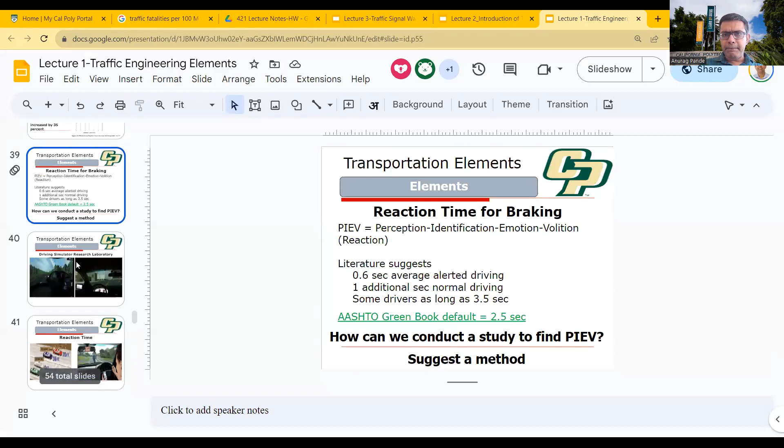So this is where we were. So let's go back and pick up this discussion. We were talking about some of the dynamic characteristics of vehicles when we left off.

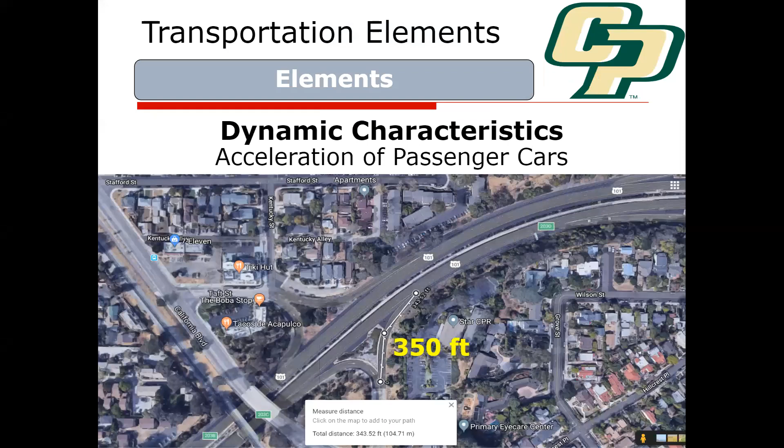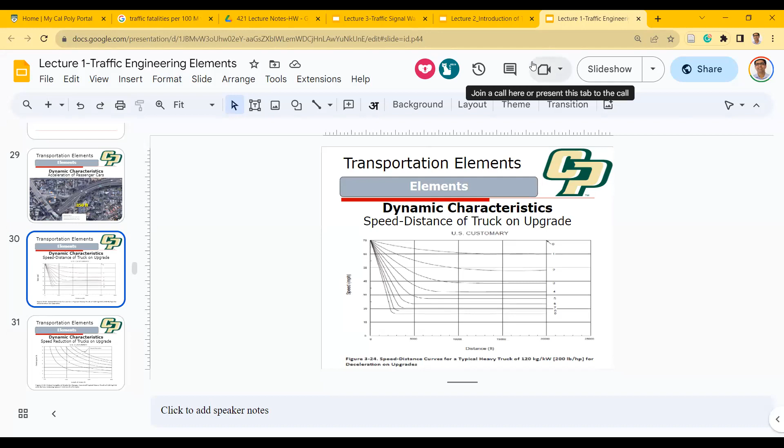So let me go ahead and do the slideshow thing here. I think we need to put videos. Video. Okay. And again, this is sort of the curve. Oh, some days it works really well, some days it doesn't. Show this.

Okay. Next up, we were talking about dynamic characteristics, and one of them we talked about was acceleration, where you have the cars having to accelerate to a certain value. And then this is about the trucks and what happens to truck speed as they climb an uphill grade. You could see that if the trucks are starting at 70 miles an hour, the speed comes down pretty significantly if they're traveling on an 8 or 9% upgrade.

And this plays a pretty important role when we are doing level of service analysis for freeways, for example, right? So if you have a certain percentage of trucks that are significant, and you have maybe just 2 lanes in each direction on a freeway, or if you have more lanes, then you obviously have, as a car, the option to change lanes and go faster, and that is okay in terms of highway capacity, and you could probably maintain a little bit higher level of service.

But if you only have, let's say, 2 lanes, and you don't have a lot of opportunities to change lanes, then the level of service gets pretty significantly impacted, because the factor for heavy vehicles goes up pretty significantly. And the reason comes from this exact curve, which is the speed-distance of trucks on upgrade. And this is US customary units. So it depends on how long your upgrade is. For example, if you have a short upgrade, something like 1,000 feet. So this is dividing it into 1,000, 2,000.

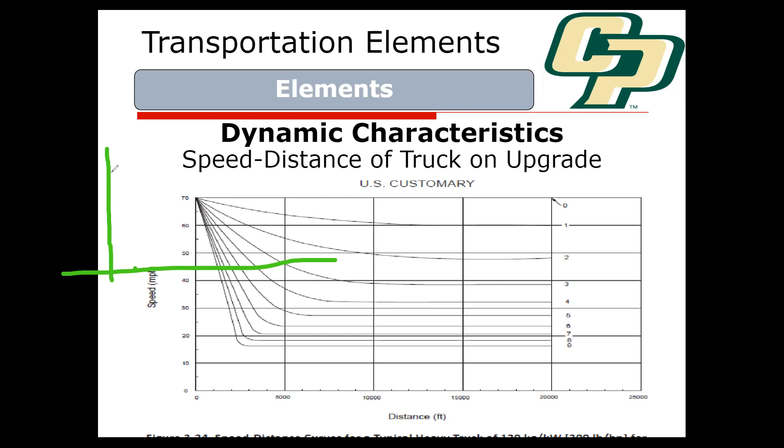So let's think about this, right? Let's say you have this speed capacity curve. I'm trying to draw a speed flow curve, and in the real world, a speed flow curve looks something like this. It remains straight for a while, and then it drops at that point, right? So sometimes what happens in rural areas is that it goes straight, and then it drops when you approach capacity.

On the x-axis you have the flow, or demand, and on the y-axis you have speed. And you could see that speed remains constant for a while, and then it drops as you approach capacity of the road. Now, in rural areas, you might be, for example, in this part of the chart. And then if you add capacity, now you're in this part of the chart.

So you're not actually impacting speed. That means you're not actually impacting travel times. And so in this case, because you're not impacting travel times, you might not be adding additional demand, because additional demand comes from actually reducing the travel cost, right? But in urban areas, it makes a big difference, because in urban areas you're mostly operating over here at capacity a lot of times during peak hours.

And if you move to this area by adding more capacity, now you're actually improving speed. That means you're reducing the travel time, and reducing the travel time would induce more demand, right? So that's an interesting question. I think that shift to VMT is pretty valuable, but I keep coming back to that question. As transportation professionals, as traffic engineers, we have to be aware of the context. The context is pretty much everything. If we try to fit in one-size-fits-all solutions, they don't always work.

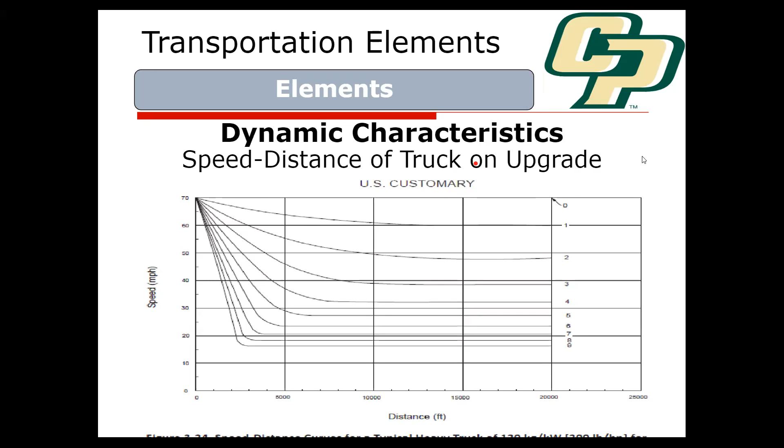Okay, and then speed reduction on upgrades. So this is, you could have a speed reduction of as much as 30 miles an hour depending on your length. So this is another way of representing something similar, but now critical length of grade for design. So this is sort of your acceptable speed reduction that would be available to you.

So if you're dealing with an 8% grade, you want to have a speed reduction of no more than 30 miles an hour, because obviously on an 8% grade, you would see a lot of speed reduction, right? But what's your acceptable value? So you want to be sort of on the edge of this curve and not go to the right of this curve. And that's acceptable.

So this curve sort of defines what your acceptable speed reduction is going to be. So if you're talking about, let's say, a 2% grade, you're going to be okay with providing like a 2,000 feet grade and a little bit less than 2%. So for a 2% grade, we are okay with a 5 miles per hour reduction. But if you're talking about, let's say, an 8% grade of 1,800 feet, then you could accept a speed reduction of up to 30 miles an hour. You don't want that to be higher than that.

So this is sort of critical length of grade for design. And then this is for a typical truck. And we assume that the entering speed is 70 miles an hour, right? So these are the curves applicable for freeways, because that's where you assume that high of a speed. And you could figure out what would be your acceptable speed reduction. And acceptable speed reduction would be anything to the left of those curves, depending upon the context that you're looking at, right?

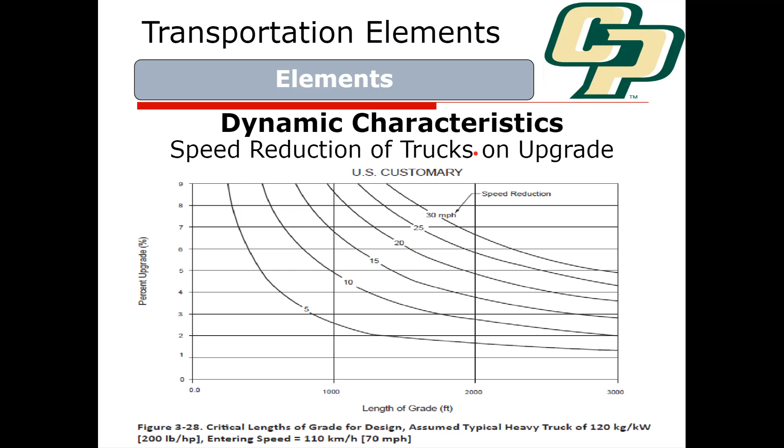And again, you could accept a larger speed reduction if you have a truck climbing lane, for example, because the trucks can simply move over to a right-hand lane or something like that. So for example, on Cuesta grade, that acceptable speed reduction works because now we have that truck climbing lane on the right side, and coming downhill as well, we have another lane. So you could work with that grade rather than having a lot of big congestion on that road.

So climbing and passing lanes, where should we add those climbing lanes? There are some sort of formulas for that. I'm going to talk about where we should add climbing lanes, especially on 2-lane roads where there are significant upgrades. We need climbing lanes. It's not necessarily that we are trying to always speed up cars, but it's also a safety concern too. Like if a big line of cars happens, and then you have these no passing zones, these double solid yellow lines in the middle.

A lot of times people will ignore those signs, right? So you want to be on the edge of that. And that's what makes it very complicated. The complication comes from the fact that you want the drivers to be at a manageable speed, but if you frustrate them too much, they will simply start ignoring your double solid yellow line and go on the other side if the queues become too long. So that is the challenge there.

And when we have these climbing and passing lanes, we have to make use of the proper signs. Make sure that the signs are in good shape, not moved because of some malfunction in your hardware. Slower traffic keep right sign. Truck traffic use right lane only. These are all signs that we need to make sure we are providing appropriate guidance.

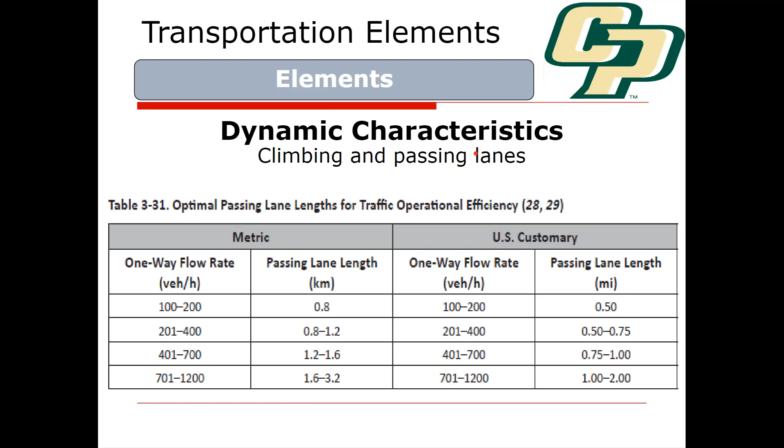So you need longer passing lanes of up to 2 miles if you have a one-way flow rate of 700 to 1200. So this gives you an idea about when you need those passing lanes, right? You definitely start to look at that when your one-way flow rate exceeds 200 vehicles per hour.

And then you need some taper. Taper is sort of the transition between where you have the passing lane or where you don't have it. And this is the formula for that. Your speed limit is higher. It's W times S, where W is the width of the road, width of the lane. L is the length of the taper.

So taper length is basically just where the 2-lane reduces from 2-lane width to 1-lane width. Okay, so that's your taper length. That's your L measurement, and you could get it from WS. If speed limit is 45 or more, then it's just W times S. That's your length. And if it's less than 45 miles an hour speed limit, then it's WS squared divided by 60. Yes. Doesn't this equation vary by state?

It does vary by state. This is the AASHTO guideline. I think California might have their own, but I'm familiar with Ohio, which uses 50 instead of 60. Right. So this is another interesting point, that a lot of states have their own design manuals. For the most part, for this class, we're going to focus on the AASHTO guidelines,

but there is a big discrepancy in some cases between how states do things in terms of highway design. So yeah, that's an absolutely correct point, that some of these equations vary by state, and that absolutely does happen. So don't be surprised if you see some other equations coming into play. I'll give you another example.

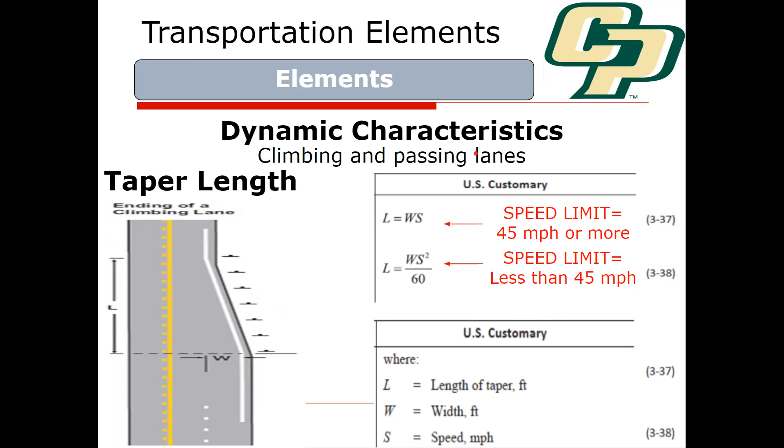So I'll do that over the weekend, and you'll start to see some applications of these formulas and questions we've been dealing with. There might be some thinking type questions as well, around the discussion we've been having. Again, you won't be able to solve all the problems, but you'll be able to solve some of them starting this weekend because we will have covered some of this material, including these formulas. Okay.

So drivers are a big element of the road because, as you said, we probably tend to overestimate their role in causing collisions and crashes, but still, they are an important part of the roadway. When design is incompatible with the capabilities of drivers, the chance of error increases. So we have to make sure that we are minimizing the chances of error and that drivers are, in fact, paying attention to the road. And this is something that they do.

For example, if you look at the highway between Los Angeles and Las Vegas, it goes through pretty flat areas, and they would introduce some curves on the road just to get the drivers to pay attention a little bit. So if you look at that highway, you will see some curves where you would think, why do we actually need that curve?

That just makes the alignment a little bit longer, maybe increases the cost of construction, all of that. But they do it to make sure that the drivers are not always just so bored driving in a straight line all the time, right? So there are things that we need to do to make sure that the drivers are paying attention.

So we always want to somehow design to minimize the chance. We don't always do that, by the way, right? We don't always do a great job of this, but this is one of our goals: to consider the human factors to design in a way that minimizes the chances of error for our drivers.

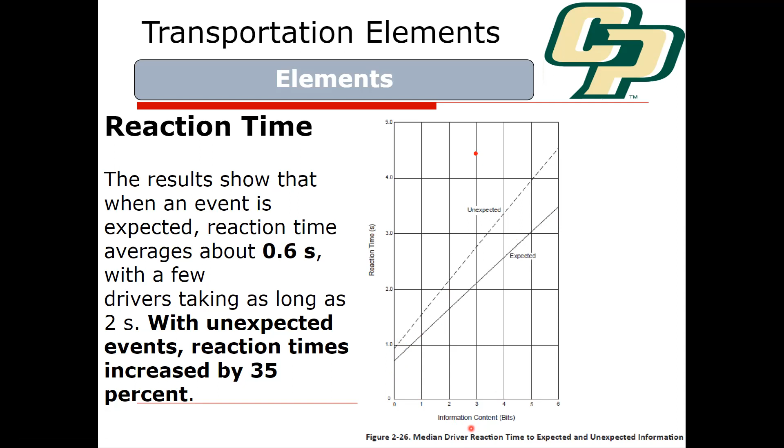Okay, so these are sort of the charts. For expected, it could be 0.6 seconds, and sometimes it could be higher depending upon the content that you are dealing with. So your reaction time could vary, and the AASHTO Green Book and all our design manuals account for that in certain ways. They'll report what reaction time you should be using for certain reactions.

So reaction time for braking is called PIEV time. It used to be called PRT, perception reaction time, in old manuals when I was in college, but they have a much more precise name for the time now. It's called PIEV. It describes the process of what happens in the human brain much better: perception, identification, emotion, and volition time. And the volition is basically your reaction.

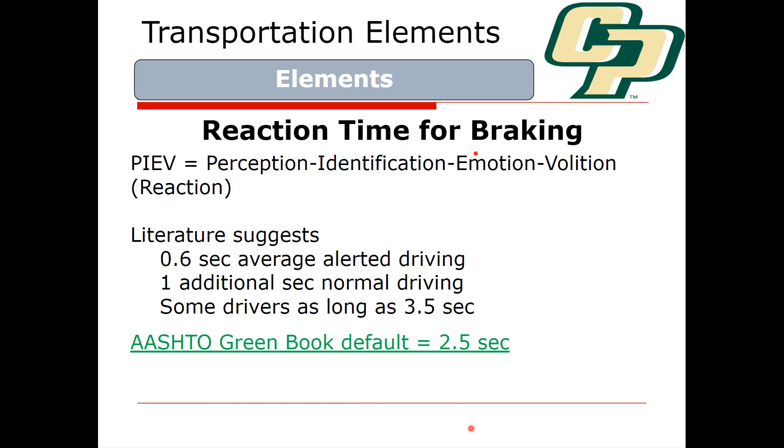Literature suggests 0.6 seconds for average alerted driving, one additional second for normal driving, and some drivers could be as high as 3.5 seconds. The AASHTO Green Book default is about 2.5 seconds. So that's some kind of an 85th percentile number, that 85% of the drivers can react within that time frame.

So how do we conduct a study to find the reaction time? Who figured out these values? Where do these values come from? What do you think are some of the ways that one could estimate these times for a population of drivers? What kind of study can you do? Any thoughts? Yes, please. You do simulated studies?

Yeah, you could do what we call driving simulation, where we have pretty extensive setups in some locations where you develop your simulation scenarios and the drivers react to them. Obviously, it's not one-to-one, and you have to somehow validate those things. But you create as realistic a scenario as possible in a driver simulation setting. That's definitely one way of doing that.

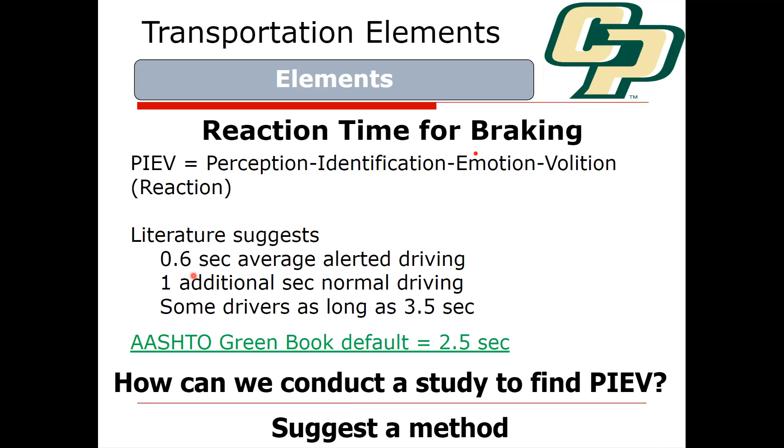And then you could do some field studies as well nowadays, because you have these cars that you can equip with certain technology, where you could record when the braking happened, and when the eyesight encountered a certain obstruction on the road. So you could do that too. So a driving simulator research lab is definitely one way to do it.

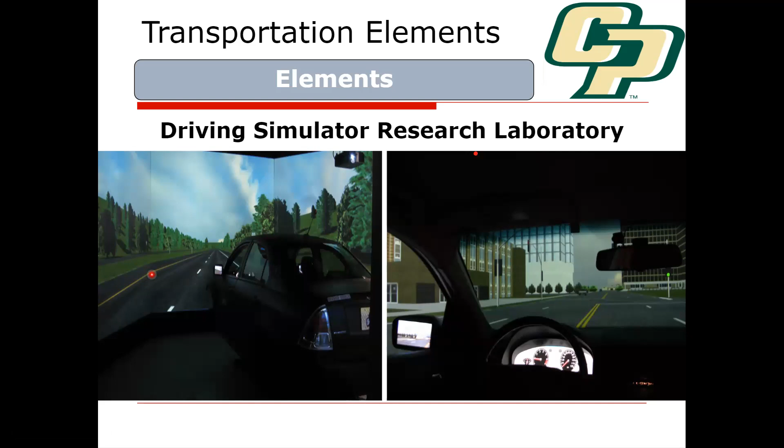And these simulators are getting pretty nice. They can become very realistic, although you see some issues like discontinuous elements on the road, but they're getting way better all the time. You have these vehicle cabs where you're driving; it almost feels like a game. But it could also give you motion sickness, because you're not actually moving, but your brain thinks you're moving. So for some people, that could be pretty challenging. So that's one way of doing that.

And then you could start conducting some study in the field, if you can monitor driver reaction by equipping the actual cars with equipment. Obviously you're not going to put a drunk driver on the road; we're not going to actually do that. So for drunk drivers, simulation might be the best way to study it. But again, you'll have to do a pretty robust study to be able to do that.

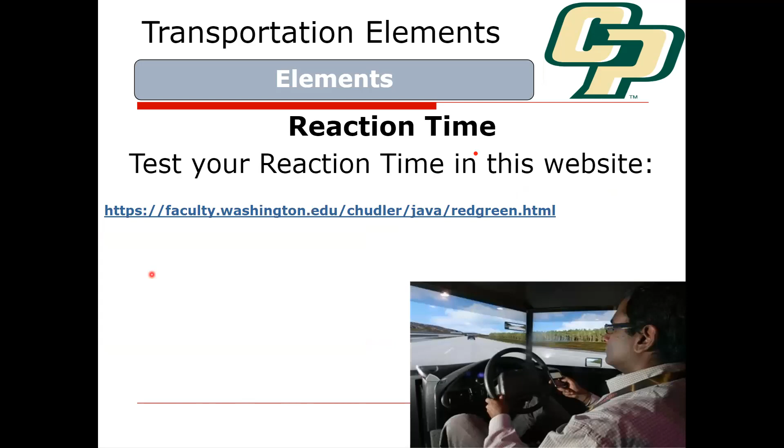So, there is a website here that you could click on. Click the large button on the right to begin. Click here to start. And then as soon as the signal turns green, you click. And this was a pretty quick reaction.

So, okay, so you could actually test yourself, like how fast you can react to certain things. Obviously, this is a computer, but you could have some fun with it, right? If you're over 21, maybe you do this one time, and maybe have a few beers, then try it again, right? So that could be pretty fun. So that link is there.

So let's go ahead and play with that a little bit and see what happens to your reaction time when you're drunk, right? So there could be some interesting, fun results there. Obviously, drink responsibly if you decide to indulge with that. But you get an idea about how slow you get when you're not actually paying attention. So something could be learned from that.

And there are these types of tests. So this is one of those, and there are other sort of green light reaction time tests that are out there. Pretty simple to build. Could be interesting. Yeah. So again, you could figure out that the reaction time can actually slow down when you're not fully engaged with something.

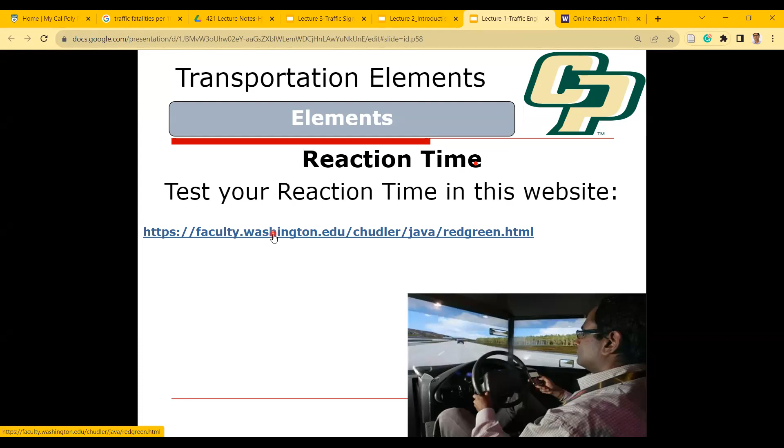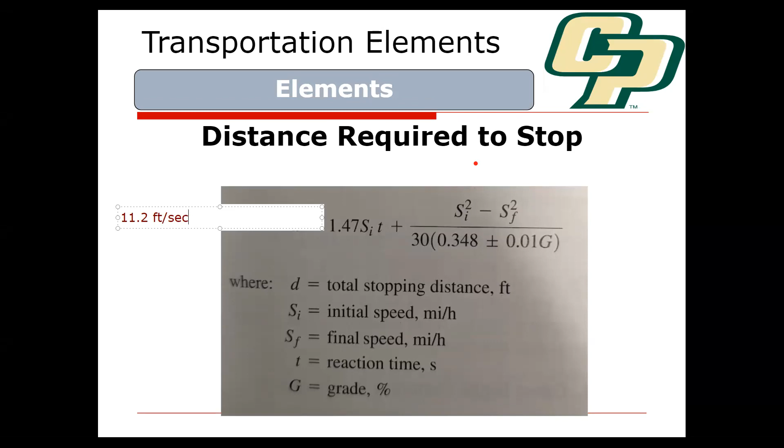And this 0.348 is based on that you can generate 11.2 feet per second squared deceleration rate. So if you assume that, you could figure out that this factor would be 0.348. And if your deceleration rate changes, then you have to come up with a slightly different formula. But for the most part, this is a good way of coming up with what type of stopping sight distance you require at all points on the road.

You substitute SF to be 0. And then remember, you can plug in D in feet, speed in miles per hour, and reaction time in seconds because of these factors that you have already added on to it. Okay, so this 1.47 is nothing but a feet to mile conversion divided by hours to seconds conversion. So 1.47 is just 5,280 divided by 3,600. That's it. Okay.

Any questions? So again, you'll have some example problems to work on this, and then we can talk about it in class as well before you submit the problem. So there will be some opportunity to practice using these formulas in class.

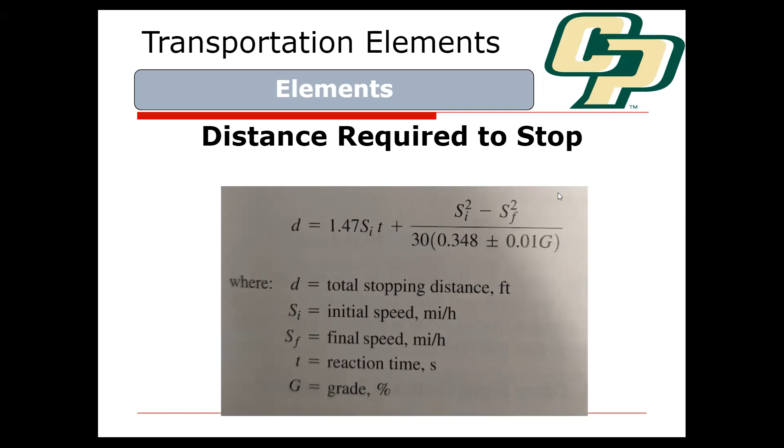And the last one is older drivers. Now, we are expecting as many as 22% of the drivers are going to be more than 65 years old by 2030. That's a pretty large number, almost a quarter. So that means we have to think about that in terms of licensing, like whether we automatically provide licenses to drivers. And that's where there is some excitement around automation as well, right?

We still want to give older drivers an option to be able to travel wherever they need to travel. So don't get me wrong, I like what's happening with automated systems, especially if they're implemented in limited areas, as long as we don't think all of our cars that are sitting in our driveways today will be replaced and automated.

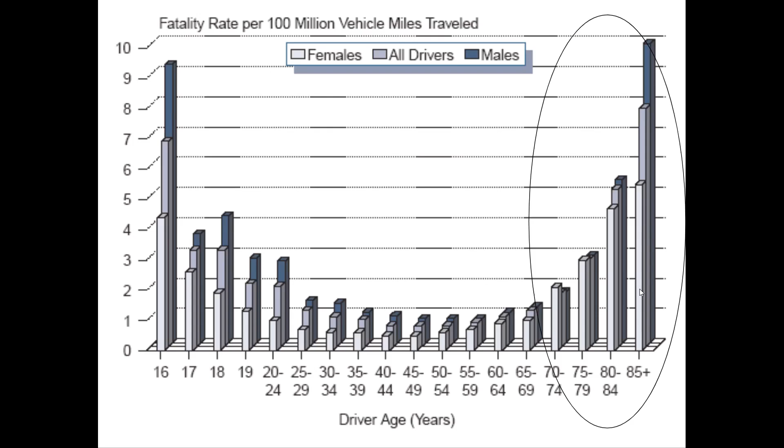Okay, so age affects drivers. The senses degrade, the vision and hearing, especially the peripheral vision degrades quite a bit actually. So vision is a big issue, and driving through intersections becomes pretty challenging for older drivers. The motor skills decline, so maneuverability becomes difficult. And then the cognitive issues: slow decision-making, cannot divide attention, poor memory, some confusion kicks in as well. So there are a lot of things that can happen.

This is another interesting question, right? The amount of light needed to see an object doubles every 13 years. So by age 85, drivers may need 32 times more brightness than they did at the age of 20. Pretty interesting statistic there. So again, nighttime driving could be challenging as well. You might want to think about, for older drivers, maybe some restrictions on what times they can drive could be useful as well.

So in conclusion, how do we provide a safe situation for older drivers? So here are some things, if you're talking about areas with a high percentage of older drivers: simpler messages, wider pavement marking lines, larger fonts on signs, brighter markings and signs, easier maneuvers somehow. So those could be some things to consider where you expect older drivers, maybe closer to a retirement community and things like that.

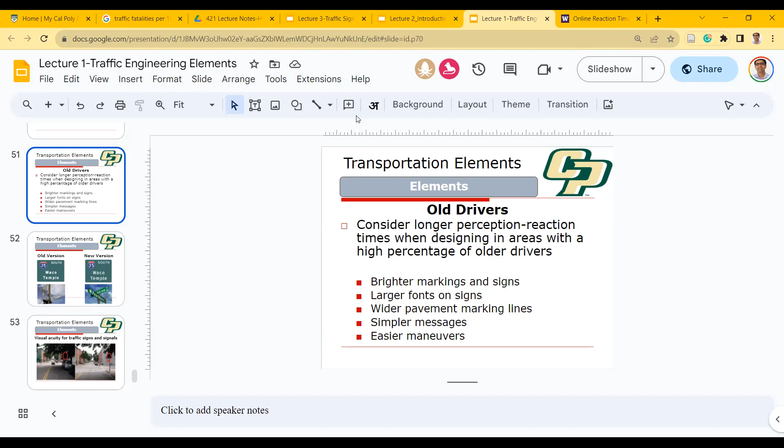Right? That's a pretty interesting number. And so that means we should be lighting up intersections as much as we can, our street lights, especially wherever we expect pedestrians.

And this also tells me that there might be some element of, and I don't know for sure, but some element of our housing issues that we are dealing with in our cities too. That might be another issue. If the unhoused people problem becomes worse and worse, there are more people who are on the road, on the street in the night times, and there might be something to that.

And that probably brings us to the problem. It's a sad situation of not a lot of political will to address that issue, because you think it's just unhoused people who are being affected by this issue. So there is not a lot of political will on dealing with that issue. And I've seen some data on it, some interesting research that came out recently on it too. So something to keep in mind. But definitely lighting would certainly help that situation.

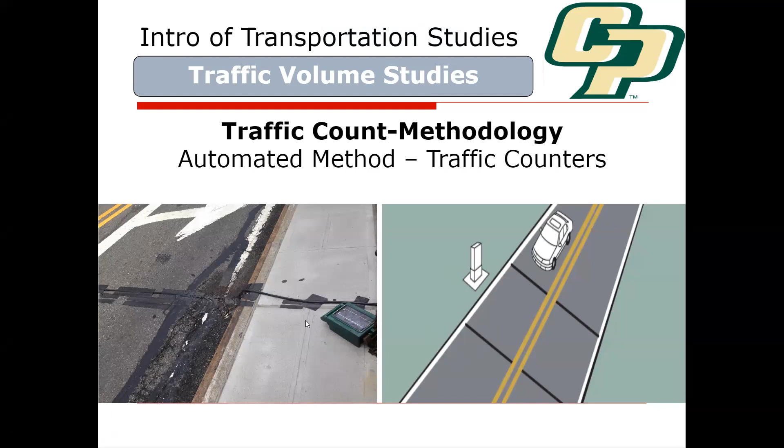And there could be some sort of RFID type, so there could be some roadside units, RSUs, along the side of the road, and then they measure how many cars are passing by. I think we were using these tube counters in our study. So this is what the tubes look like. We just put those tubes in there, and then we just count how many. These are connected to some roadside unit that you can basically pull out once you're done with the data collection, and it reports how many cars pass by.

It can even classify whether it was a car or a bus or a bike or a truck. So all of that could be classified. So that's pretty neat. And if you're curious how that works, I think on the pedestrian bridge on California Boulevard, that technology is still there. You could see that they have placed the tubes there, and they just count how many bikes and pedestrians are crossing. I think they're specifically interested in the bike count to be able to demonstrate the value of that bridge.

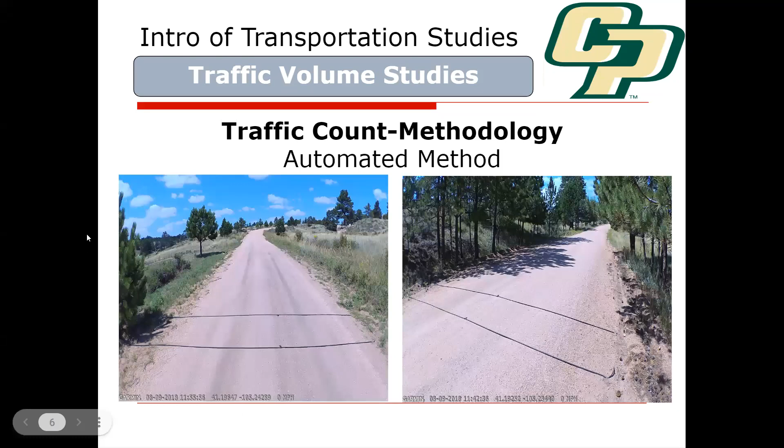So I think this is the report of the roadway location that we showed you in the previous slides, right? So it's this road probably where this data is coming from. Pretty rural, unpaved road. So some manual methodologies, tally sheets.

What tally sheets look like is this. If a truck passes by, you just put a tick mark here. And then if another truck passes by, you put another tick mark. Car passes by, you just make a tick mark. So you could see, okay, I'm gonna just have 1, 2, 3. As cars pass by, you just count them. So 5, and then just do the tally marking that we normally do.

And then depending upon which turn they're making, right? Right turners, left turners, through vehicles you count here. For left turners you count here. You just start putting where they're coming in. Now again, if it's a complicated intersection, you might need more than one person to do this type of data collection manually. And then there are actually boards where you can just press a button rather than having to control the markings. So there are those technologies available. I think I could probably show those to you as well.

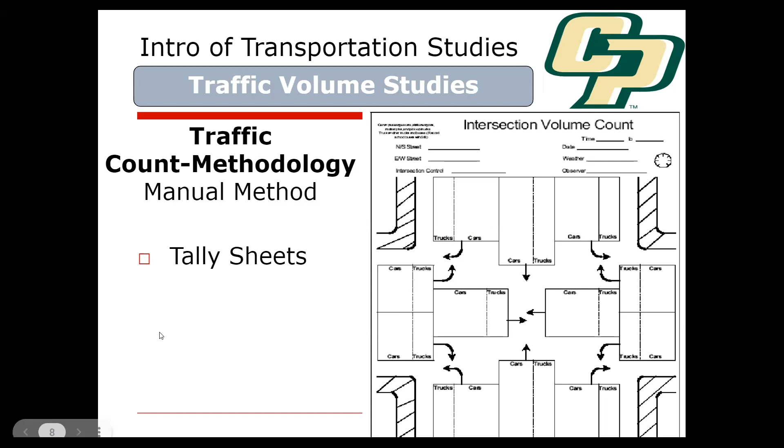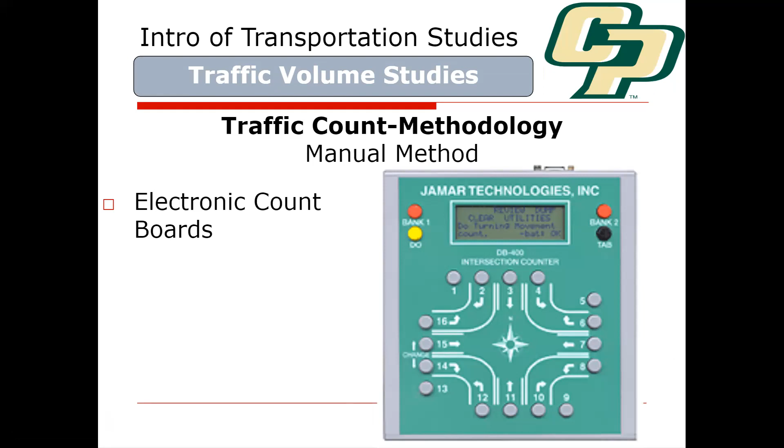So this is a mechanical count board, so you can just press buttons, and these buttons are right, through, and left, and it automatically fills out that tally marker. So there are those types of technologies. So these are mechanical counting boards. Newer ones are more electronic, and these are pretty commonly used as well. You just take this equipment, plug it into a PC, and it generates the kind of report that I just showed you.

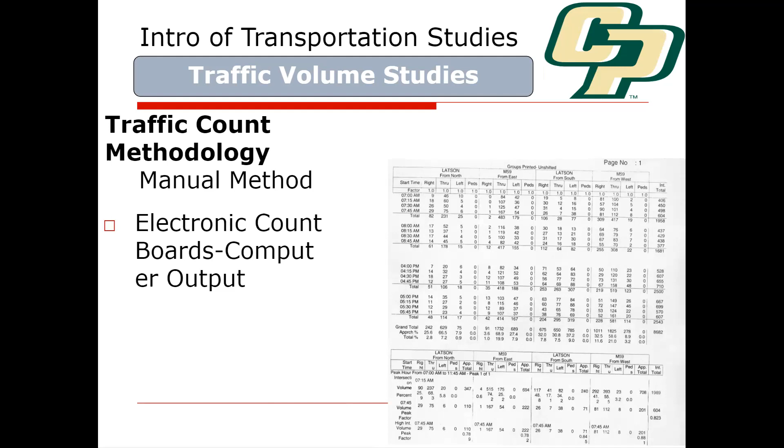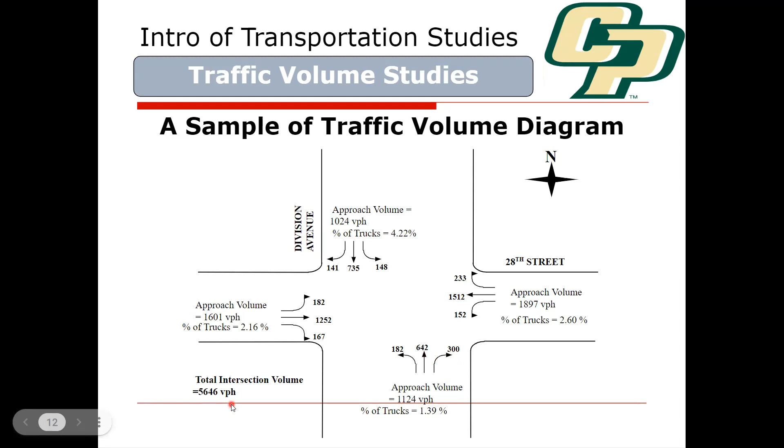So the question becomes, what time should we collect the data and all of that? So now that we have some idea of what the data looks like, in the next class, we start discussing when do we go out and collect data? What are the implications of collecting data over the weekend versus weekdays?